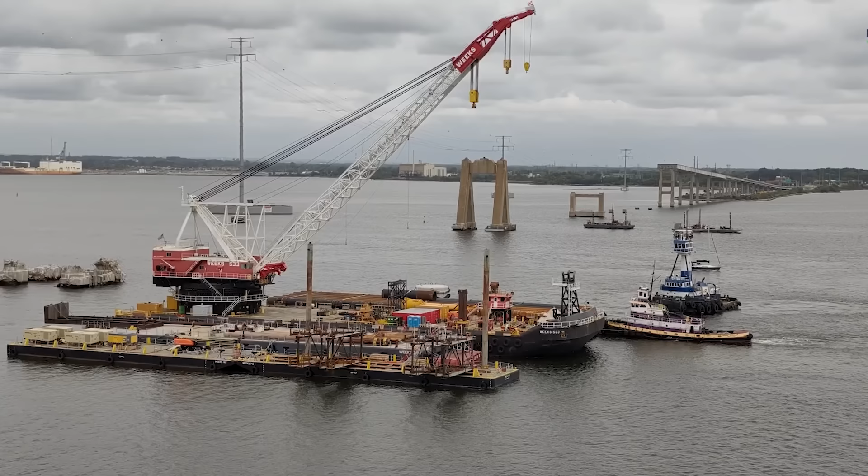In early 2024, a single electrical failure on a container ship and a bridge design from the 1970s triggered one of the most expensive bridge rebuilds in US history. Now the federal government is paying billions to replace a 2-mile crossing with something taller, longer, and built like a fortress. A new Francis Scott Key Bridge that will cost up to $5.2 billion,

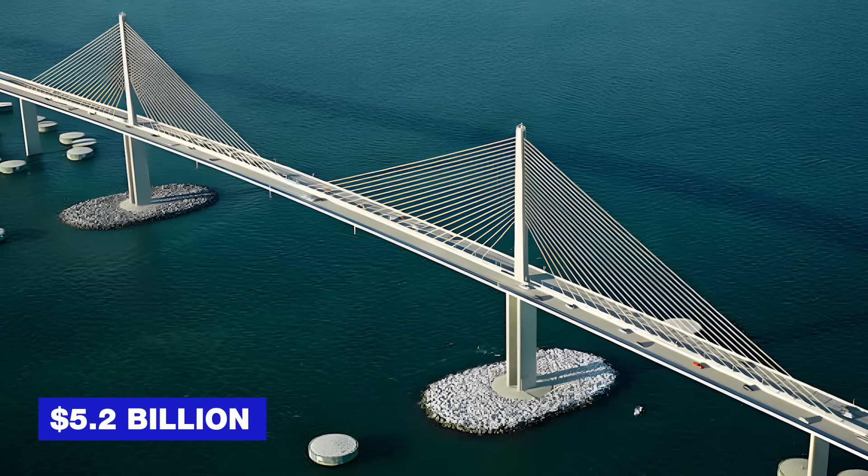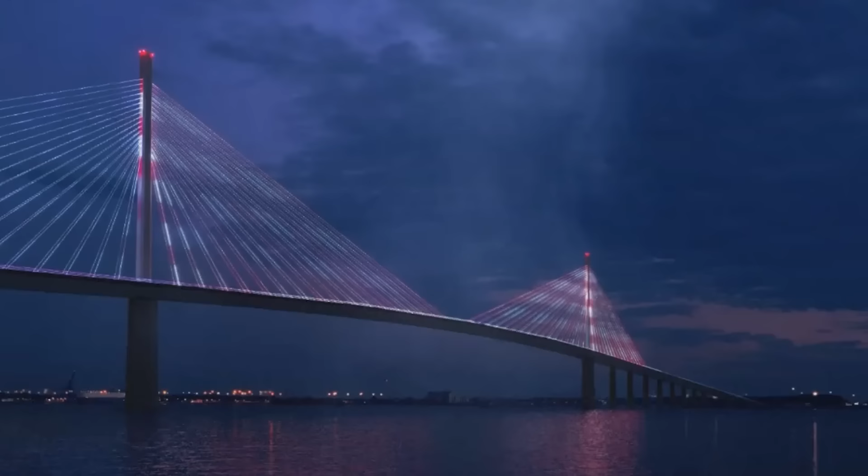rise high enough for a 20-story building to pass beneath it, and defend itself with man-made islands designed to take the hit if a ship ever loses control again. This is the insane scale of America's new $5.2 billion Key Bridge, and why it has to be this extreme. To understand that, we have to look at what fell and how vulnerable it really was.

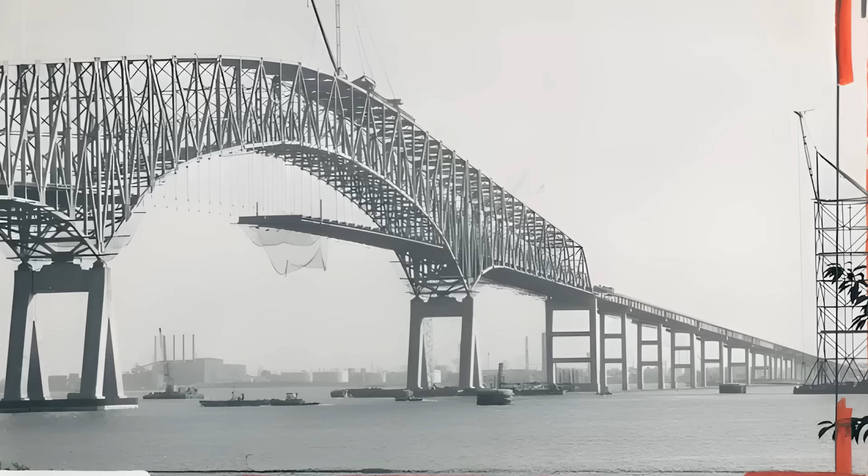When it opened in 1977, the Francis Scott Key Bridge completed Baltimore's outer beltway. It was a steel truss bridge almost 1.6 miles long, with a 1,200-foot main span stretching across the Patapsco River. Before the collapse, it carried around 40,000 vehicles a day. For almost 5 decades, it did its job without drawing much attention until March 26, 2024.

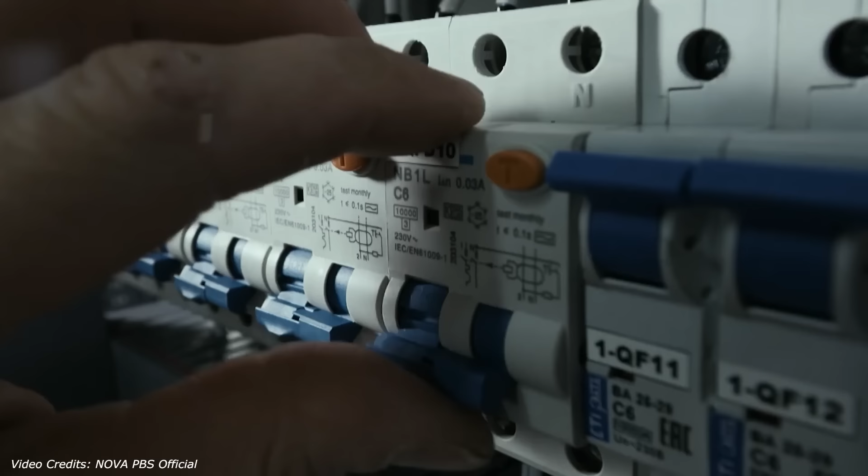That morning, the MV Dali, a fully loaded container ship, was leaving Baltimore Harbor. Then, without warning, it lost power. Investigators later found the cause to be a single loose wire. Not a major failure, not a complicated breakdown. One electrical connection shook loose while the ship was maneuvering. The vibration broke the circuit. The ship's electrical system shut down. Lights off, steering gone. At that point, the Dali was drifting at 8 knots with no way to stop.

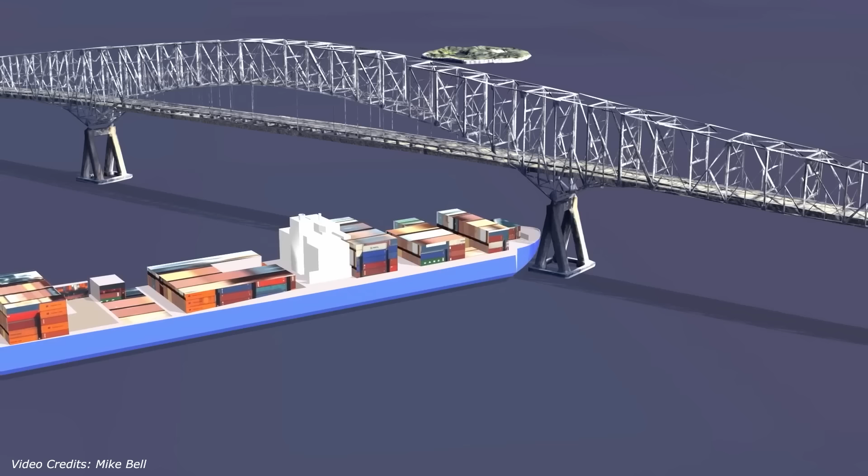It struck Pier 17, and this exposed the bridge's biggest weakness. It was fracture critical, meaning if one main support failed, the entire structure could collapse. And it did within seconds. But there's another part of the story. The people responsible for the bridge had been warned about this exact vulnerability.

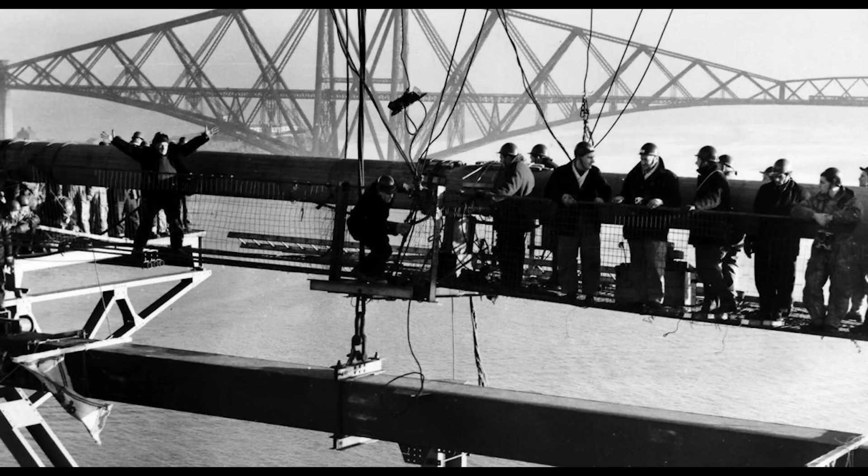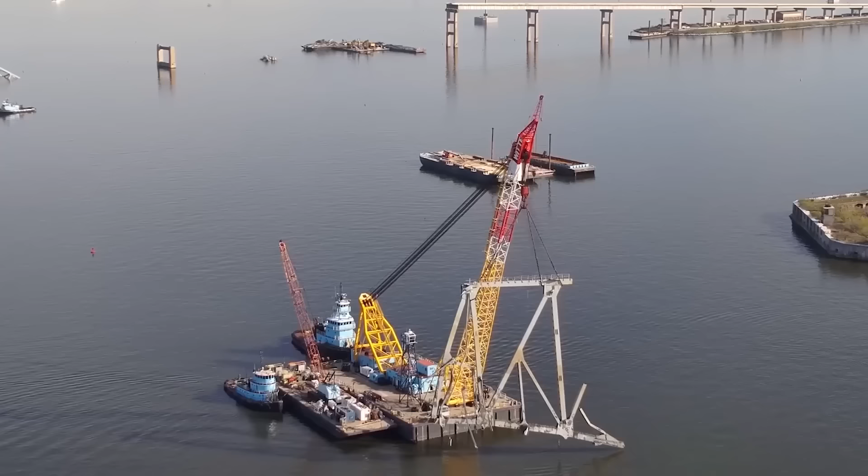Federal guidelines in 1991 recommended risk assessments for bridges like this. The same recommendation came again in 2009. Neither assessment was ever done. If they had been, the danger would have been impossible to ignore. By current standards, the Key Bridge was operating at a risk level roughly 30 times higher than what's acceptable for a major ship collision. So this wasn't just a ship losing power.

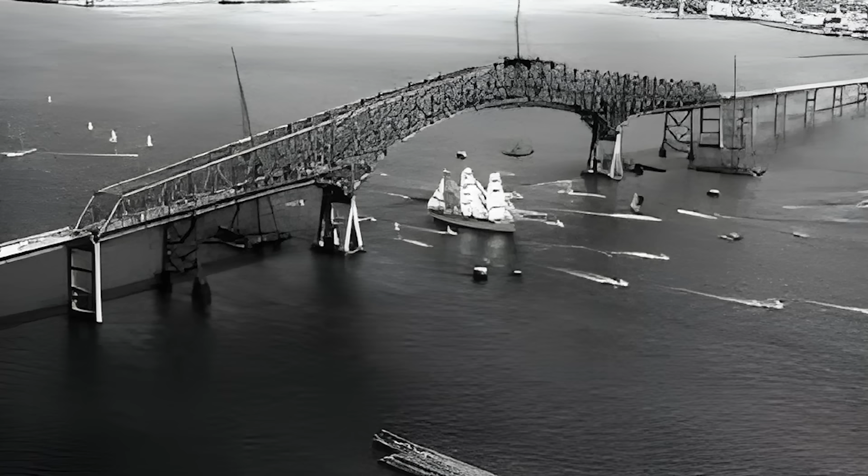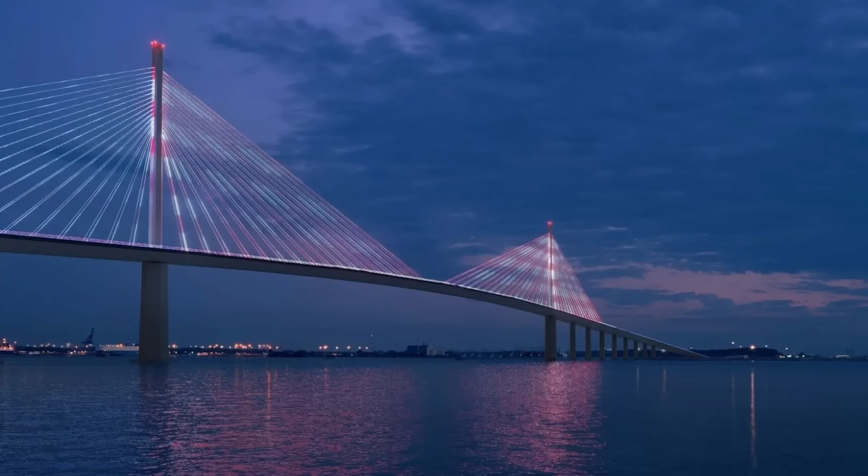It was a bridge designed in the 1970s facing ships that are far larger and heavier than anything its engineers ever planned for. And those ships aren't getting any smaller. The replacement for the Key Bridge isn't just a fix, it's an upgrade on almost every dimension. Taller, longer, and much harder to hit.

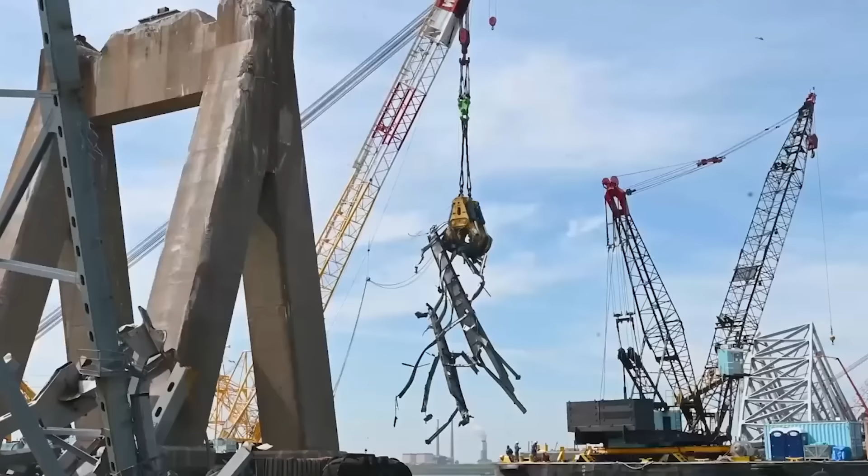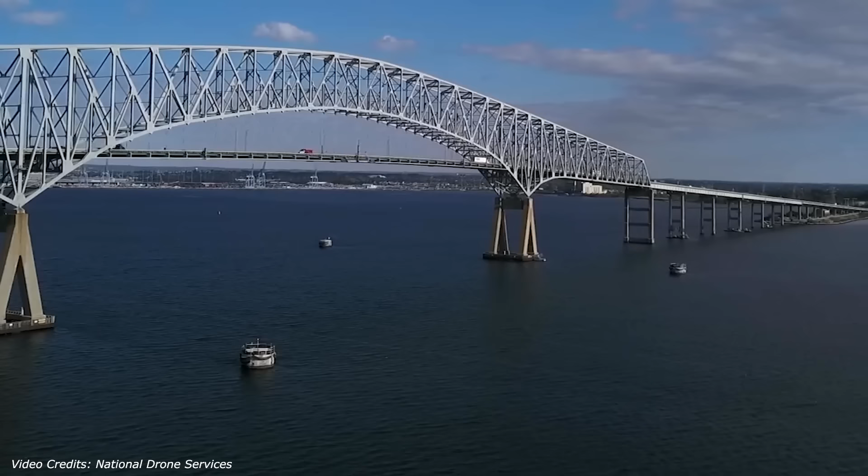Cargo was stacking up. The port was bleeding money, and every day counted. Within weeks, crews began removing the wreckage. By late spring, ships were moving again. But rebuilding the bridge itself was a completely different decision. The structure was nearly 50 years old. It had just shown how vulnerable it was. So instead of recreating the old design, officials chose to build something entirely new.

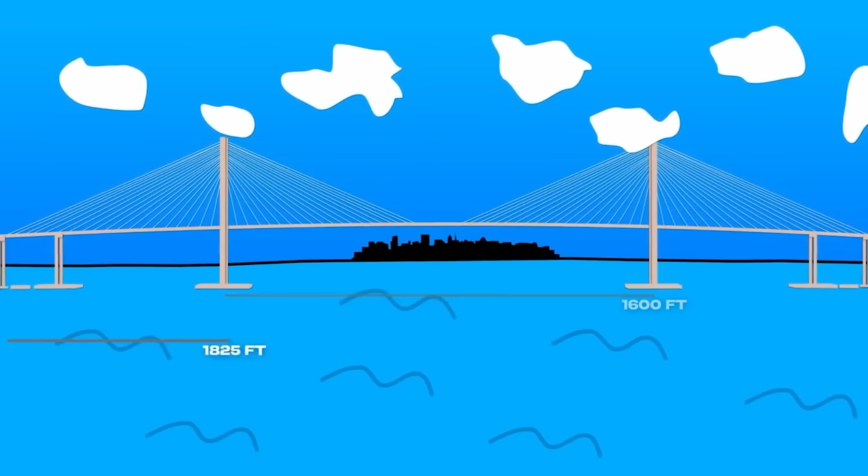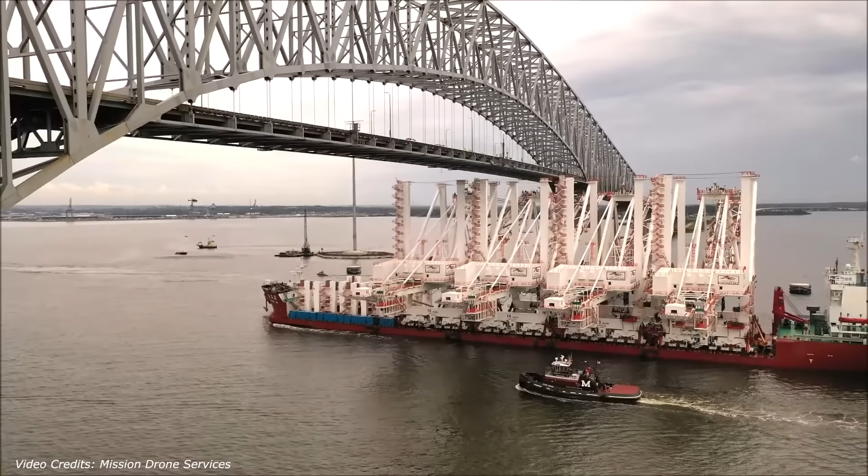A cable-stayed bridge with towers rising more than 600 feet and a main span of 1,600 feet, roughly 400 feet longer than before. Why go bigger? Because the old bridge forced ships through a tight opening, 1,200 feet wide and only 185 feet of clearance. In 1977, that worked because container ships were small. But by 2024, they were stacking containers 20 stories high.

Many modern vessels need more than 190 feet of vertical room just to pass under a bridge. The new design raises the clearance to 230 feet, and it spreads the main supports far enough apart to create a navigation channel more than 1,000 feet wide. That space isn't just for size, it's for control when something goes wrong.

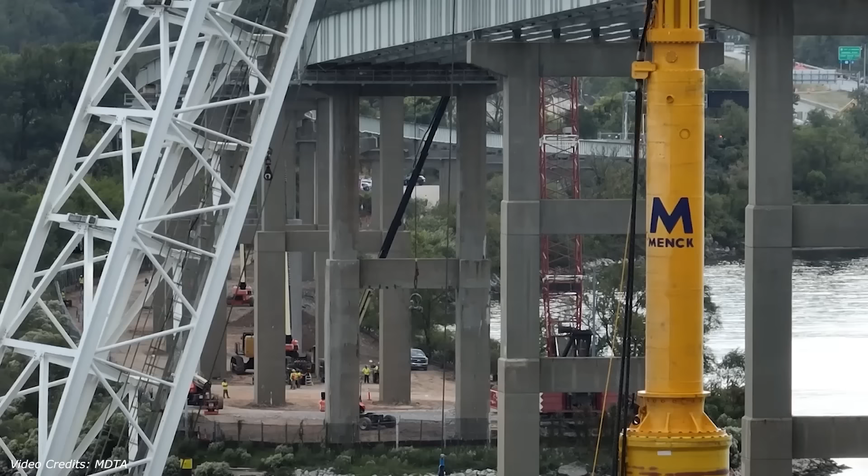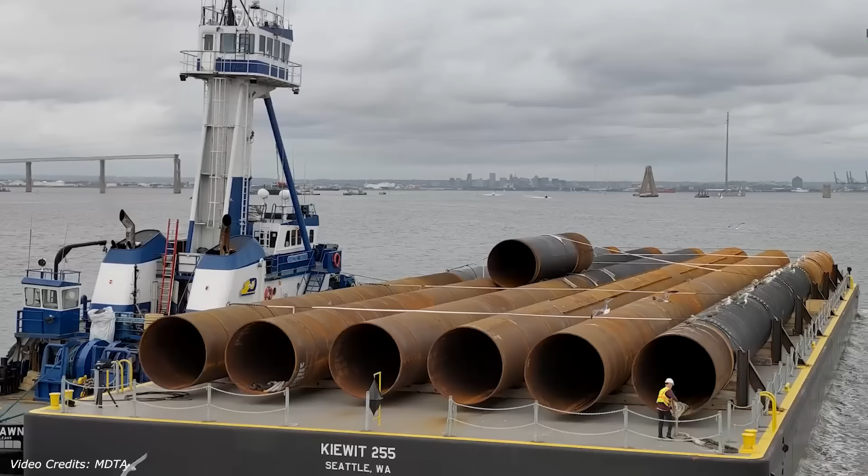But building a bridge that tall over deep water creates its own challenges. The foundations have to reach down through layers of mud and sediment that have settled for centuries. Right now, crews are running a test pile program. They're driving huge steel shafts into the riverbed and loading them with up to 10 million pounds to see how the ground responds.

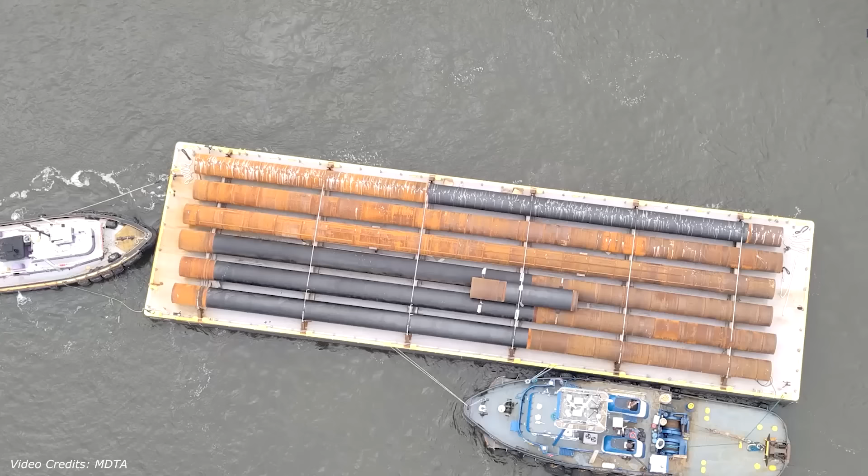Those numbers decide how the real foundations get built and whether the towers can safely rise more than 600 feet above the water. That testing alone takes 6 to 8 weeks.

The new bridge will still carry 4 lanes just like before, but with a big difference. The lanes will be wider and there will finally be real shoulders. On the old bridge, a broken down car blocked an entire lane. Now, drivers will have space to pull over.

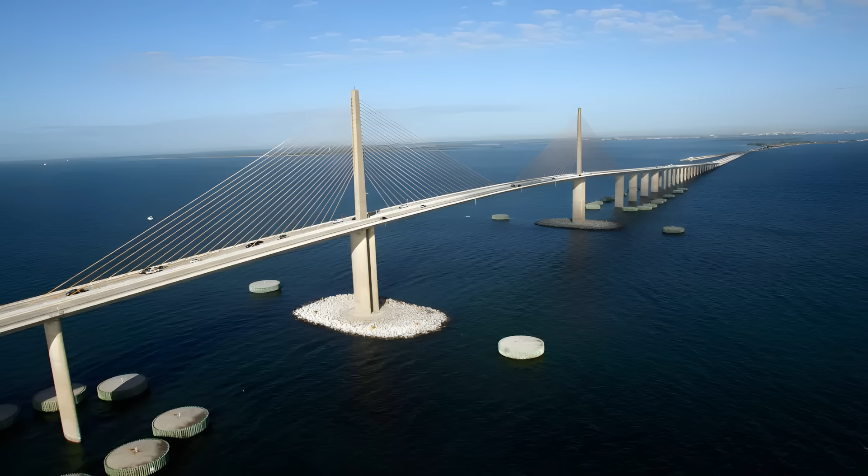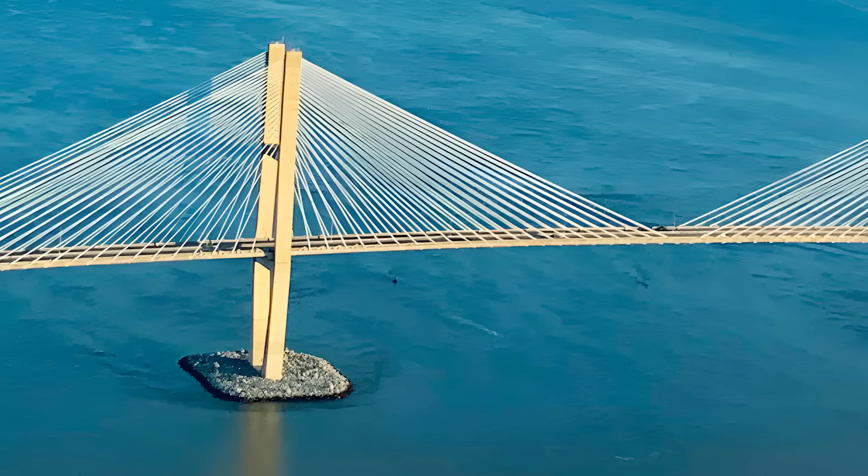And then there's the defense system. How do you stop a 1,000-foot ship from taking out a bridge pier ever again? Each main tower will be surrounded by artificial islands built from rock, concrete and fill. If a ship loses control, it hits the island instead of the bridge. The sloped sides force the hull to ride up and run aground before it ever reaches the tower.

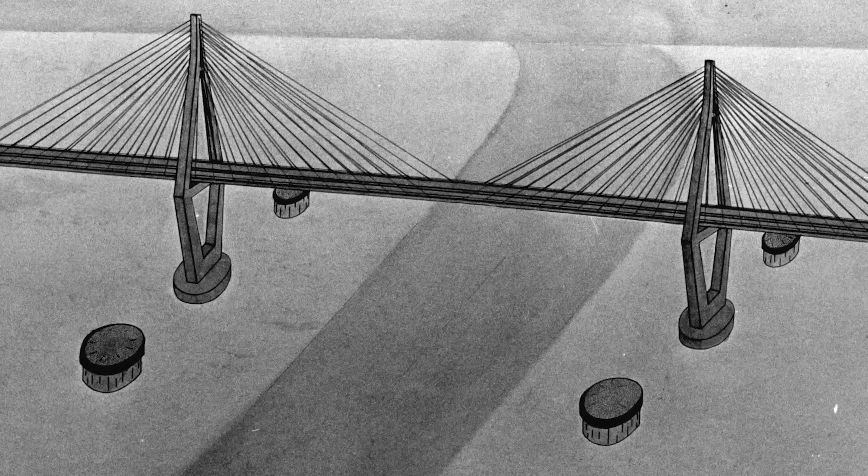On top of that, 6 enormous dolphins will sit around the navigation channel. They're standalone structures designed to absorb the impact of a fully loaded container ship. If a ship hits one, the dolphin takes the blow and the bridge survives. This protection system is a major reason the cost keeps rising. You're not just building a bridge, you're building a shield around it.

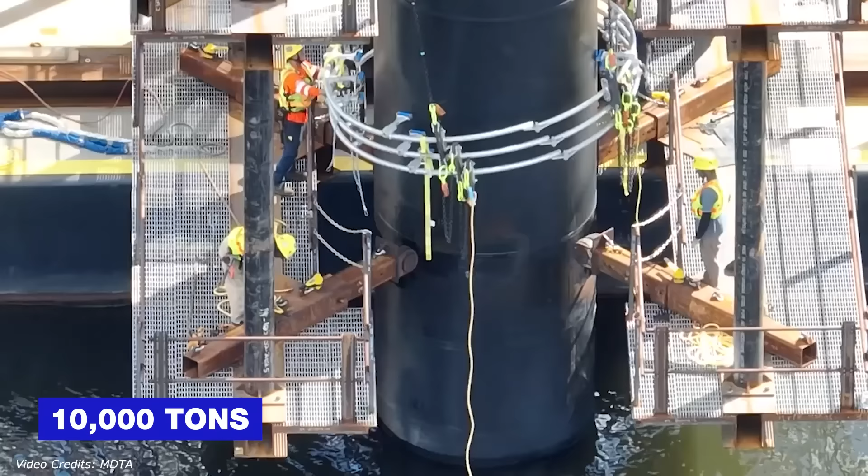As for the old bridge, most of it was removed when the channel was cleared. The steel truss is being cut into sections, shipped to permitted facilities, and recycled as scrap metal rather than just dumped. On site, about 10,000 tons of concrete from the old deck has been stockpiled and is being crushed for reuse on the project, things like temporary haul roads and staging areas.

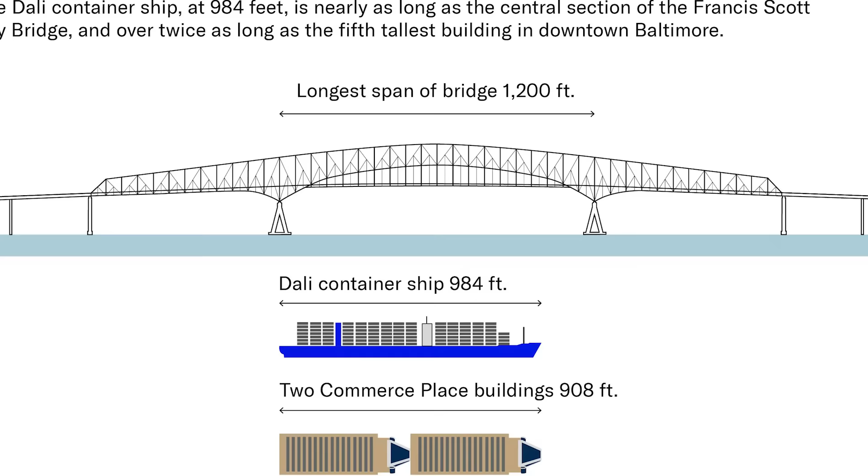Some of the old approaches may still be reused, but the main span is gone, and rebuilding the original design was never really on the table. That idea disappeared the moment the bridge fell. The problem is, building a bridge this tall, this protected, and this future-proof doesn't just change the skyline over Baltimore, it completely changes the price.

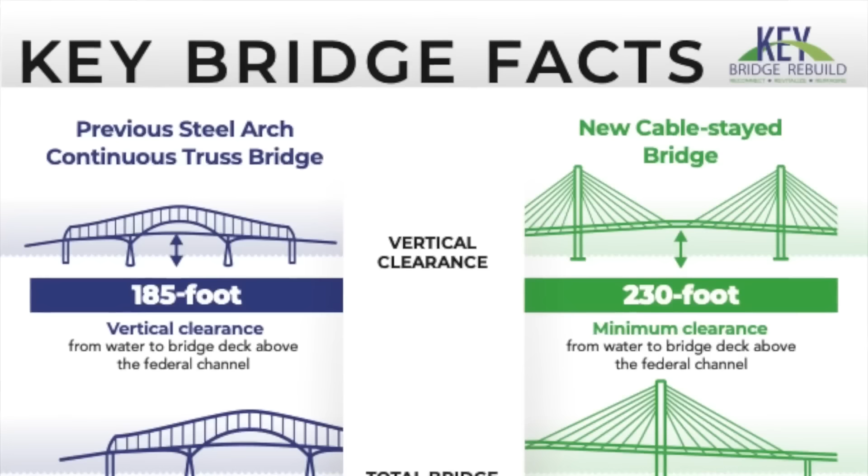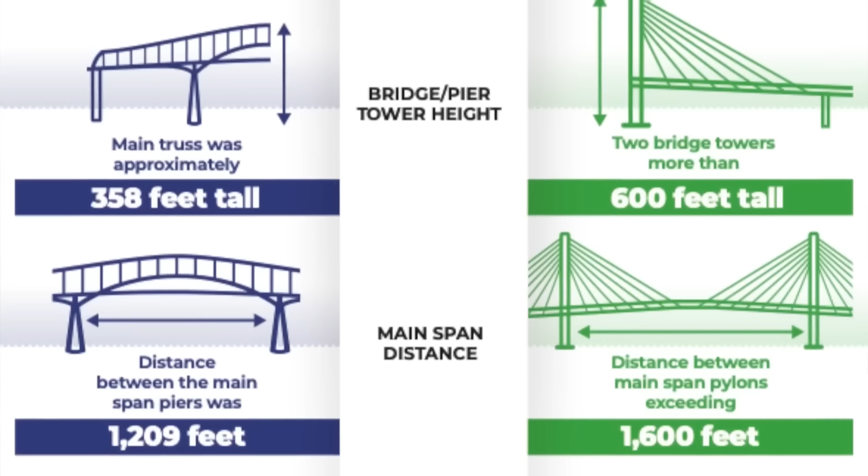So now the question is, how does a bridge project jump from under $2 billion to more than $5 billion in less than 2 years without adding any extra lanes? Back in April 2024, early rough estimates put the cost between $1.7 and $1.9 billion. By November 2025, that number had climbed to between $4.3 and $5.2 billion. And this is pretty normal when rough sketches turn into real engineering. Here are the 4 factors where the budget is going.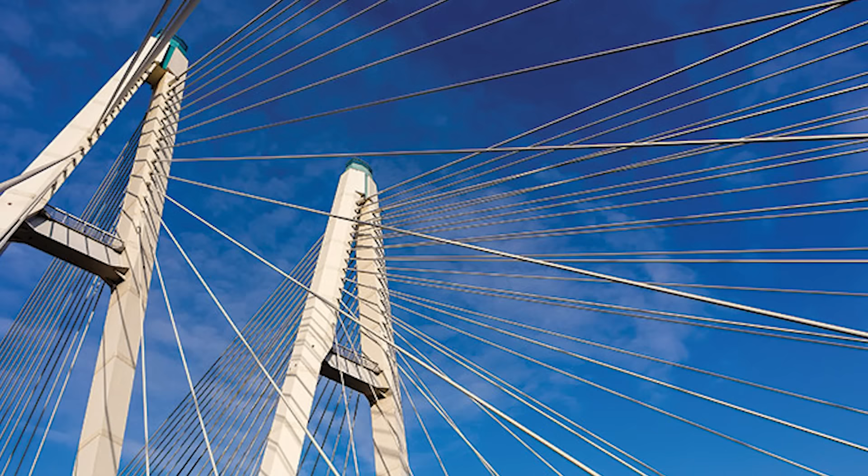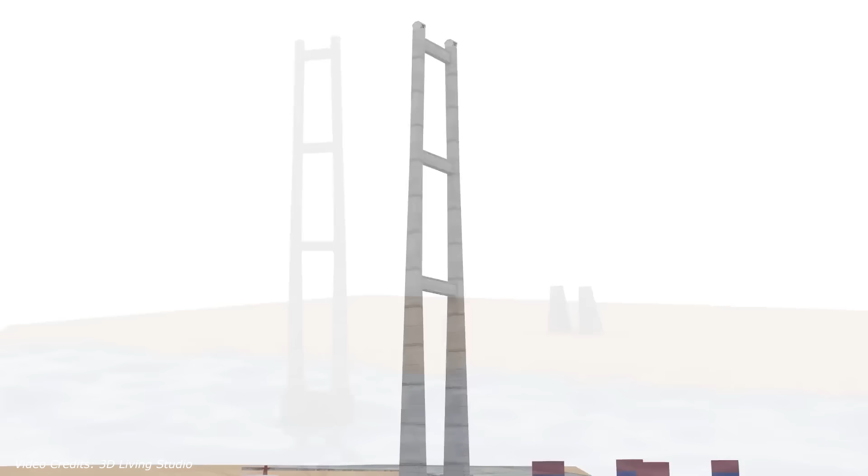First, the bridge itself. A cable-stayed span that stretches 1,665 feet needs huge amounts of material. High-strength steel for the cables, reinforced concrete for the towers, and deep foundations to hold everything up. And long spans don't scale simply. Every extra foot adds more complexity, more weight, and more cost.

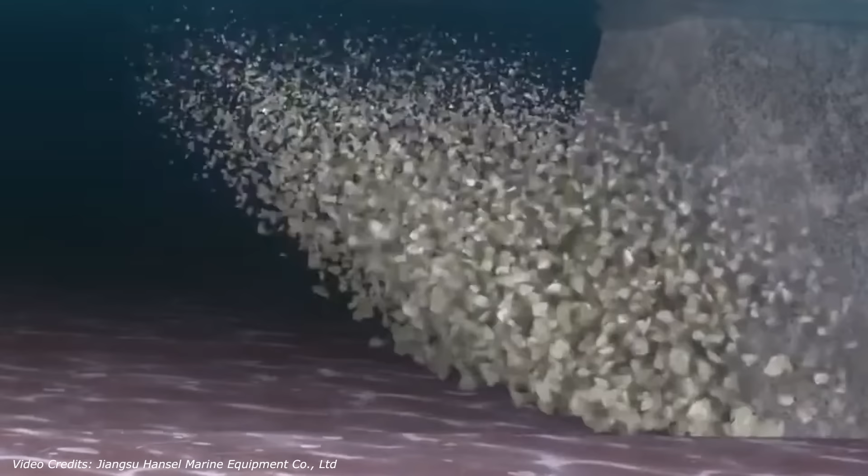Then comes the protection system. The artificial islands and the massive dolphins are a project of their own. They require millions of cubic yards of rock and fill, all built in the middle of an active shipping channel. And because these structures permanently reshape the riverbed, every step comes with strict environmental rules. This defensive system is one of the biggest drivers behind the doubled budget.

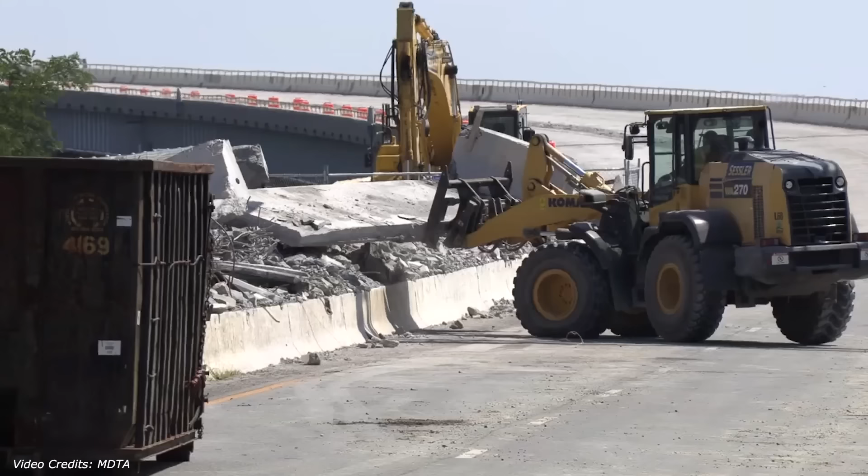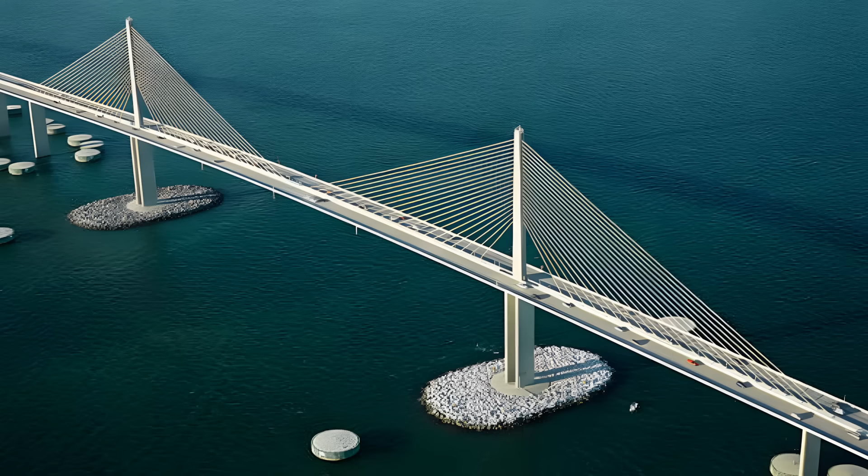Inflation plays a major role too. The Federal Highway Administration reports a 72% increase in highway construction costs over the past 5 years. Steel, concrete, heavy machinery, skilled labor, everything is more expensive. And with the bridge scheduled to open in 2030, every contract has to include future cost increases as well.

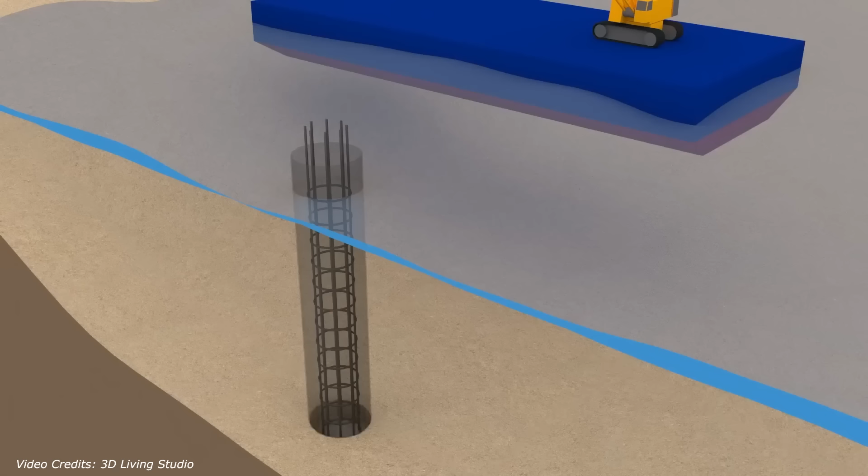There's also the speed premium. Normally, a project of this scale would spend years in planning and environmental review. This one couldn't wait. Design work and construction are happening at the same time. That speeds up the schedule, but it increases risk, and contractors charge more to take that on.

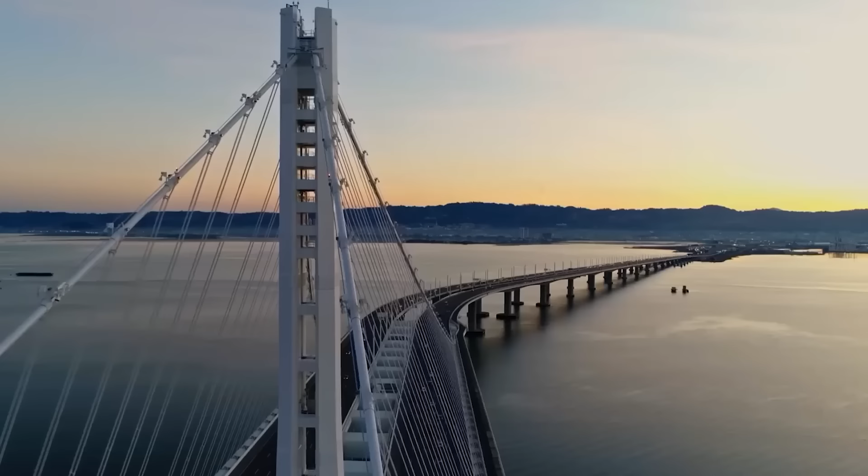So how does $5.2 billion compare? For reference, the eastern span of the San Francisco-Oakland Bay Bridge cost about $6.5 billion, and that was over a decade ago. Measured per mile, the new Key Bridge sits alongside some of the most expensive bridge builds in U.S. history. Not the single most expensive, but absolutely in the top tier. In other words, this isn't a routine replacement.

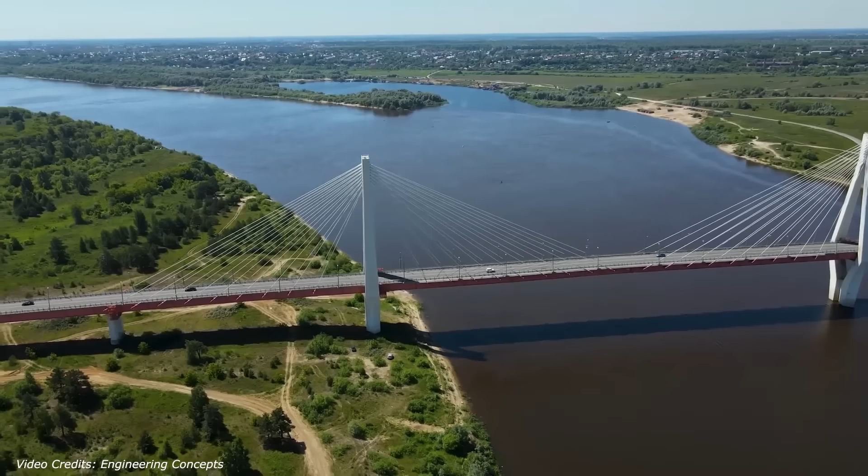It's in the same spending league as the headline megabridges you've seen on the news. So is 6 years actually fast for rebuilding a bridge like this? The new Key Bridge is expected to open in late 2030, about 6 years from collapse to completion. Globally, that may not sound fast, but for American infrastructure, it is.

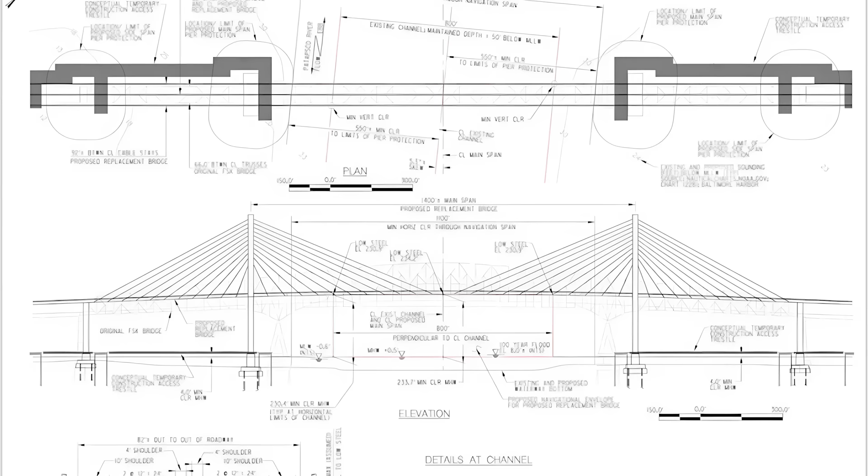It is because in the US, major bridges normally spend years, sometimes nearly a decade in design work, environmental review, and public meetings before any construction begins. The Key Bridge didn't follow that playbook. Design work started almost immediately after the collapse. Permits were pushed through quickly, and the project is using a delivery method called progressive design build, which lets contractors start early work while the final design is still being finalized. That overlap saves years. But it doesn't remove the realities of building something this large over water.

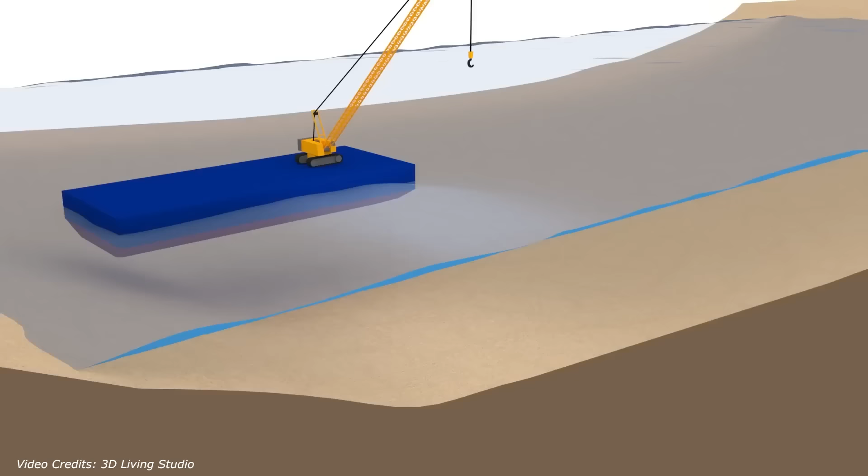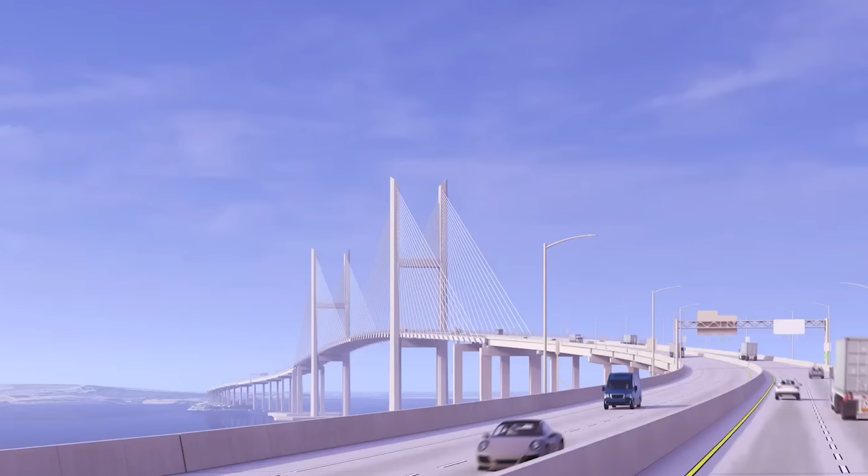Foundation work is set to begin in Q2 or 3 of 2026. After that comes the towers, then the cables, then the deck. Each step relies on the last, and marine construction leaves no room for shortcuts. Storms, tides, equipment moves, and narrow work windows all slow progress. So what will drivers see when the bridge opens?

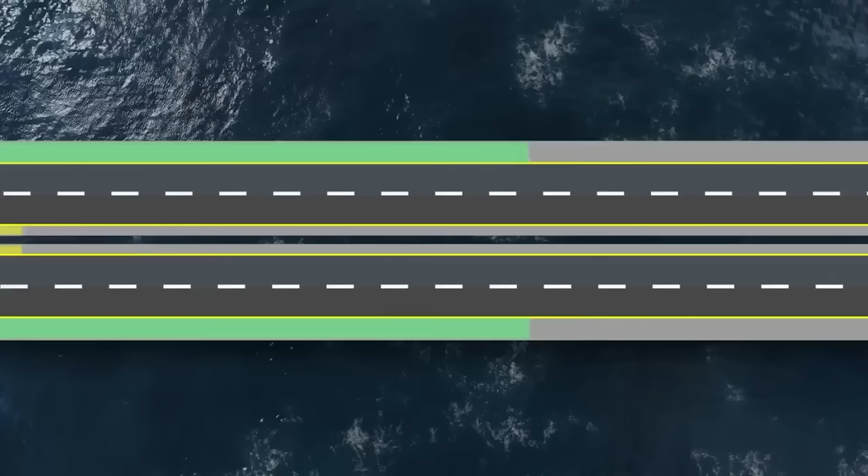Still 4 lanes, but the experience will feel different. Wider lanes, real shoulders, better visibility. For truckers heading to the port, it's the same route they've always taken, but for the port itself, this clearance upgrade is enormous. A 230-foot vertical clearance isn't just for ships today. It's built for ships that don't exist yet. The global fleet keeps growing. 20 years from now, vessels entering Baltimore will be larger than anything the old bridge could have handled. This new one is designed to stay ahead of that curve.

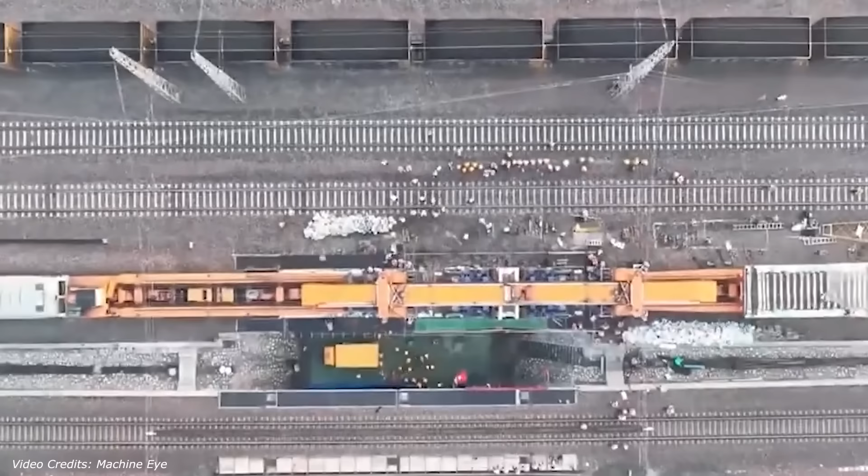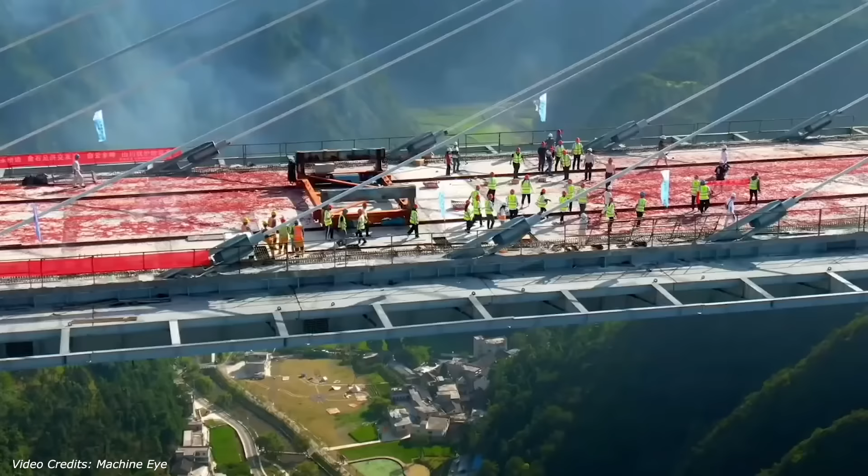It's true that some countries build faster. China, for example, has delivered similar scale bridges in equal or even shorter timeframes, but they operate under a different model. There's less regulatory oversight, centralized authority, and quicker land approvals. The US trades speed for more review, more process, and more environmental protection. The design of the Key Bridge does help with speed, though. Cable-stayed bridges need fewer piers in the water, which means fewer deep foundations, the slowest part of any marine project.

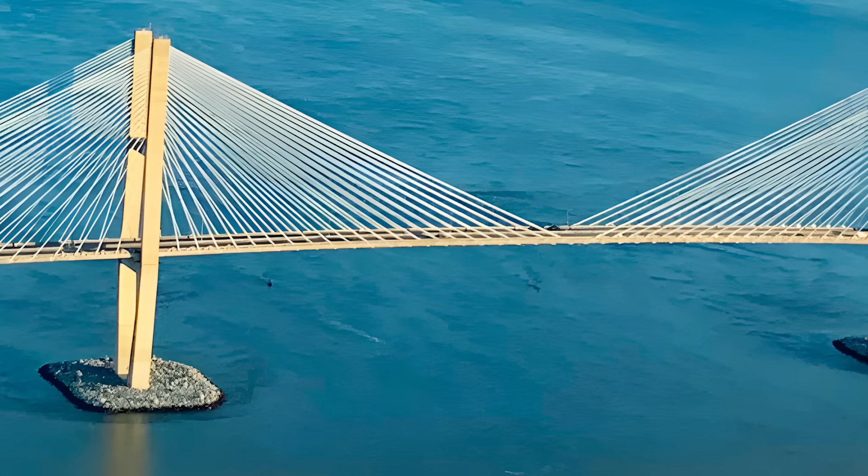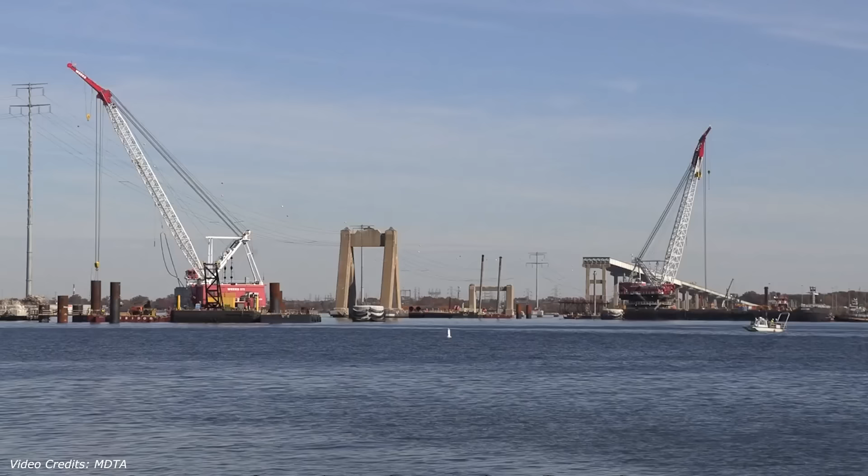And that fortress protection system helps too. By placing the main supports outside the navigation channel, workers don't have to shut down ship traffic every time they build a pier. Even with all these efficiencies, finishing a project of this scale in 6 years is considered a sprint in the world of infrastructure.

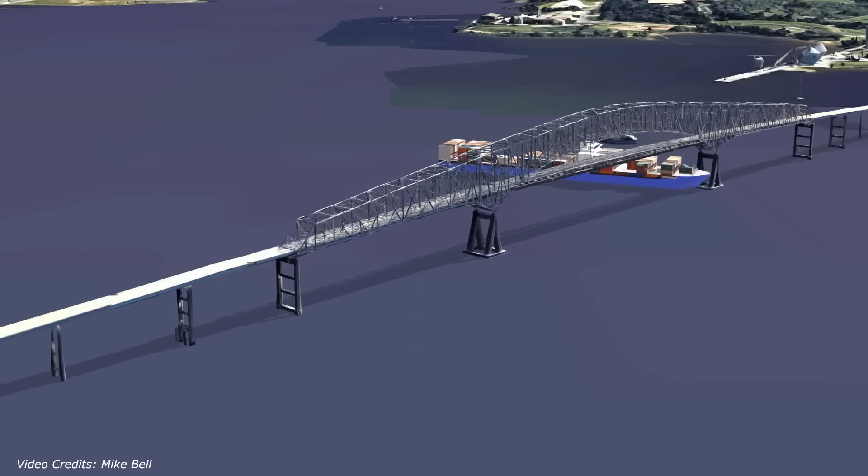Before we finish, there's something we can't skip. The people who were on the bridge that night. 6 construction workers were out there doing overnight maintenance when the ship lost control. They never had the chance to get off the span. Their families are still living with that loss. Memorials line the waterfront, and the final design for the new Key Bridge includes a permanent memorial to honor them.

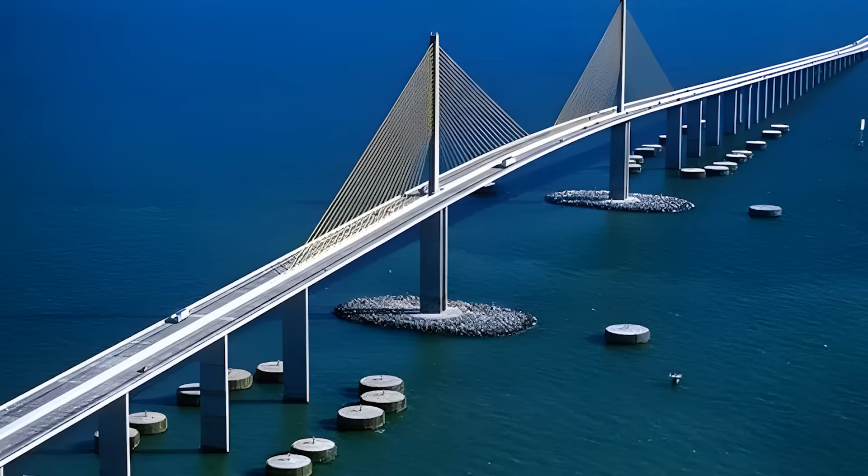This new bridge is meant to make a disaster like that much harder to repeat. Stronger wind standards mean the towers and deck are designed to handle hurricane-level gusts. A higher deck helps protect against storm surge. And even though Baltimore isn't a major earthquake zone, the structure is still being designed to meet modern seismic requirements, on top of a pier protection system that simply didn't exist before.

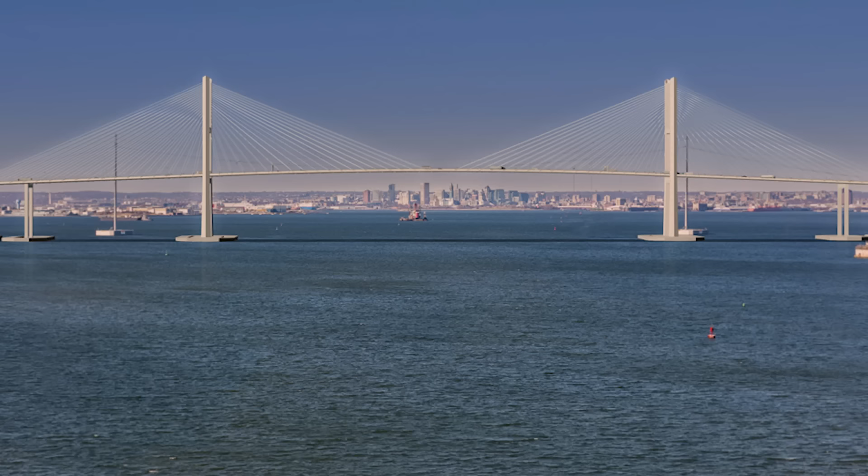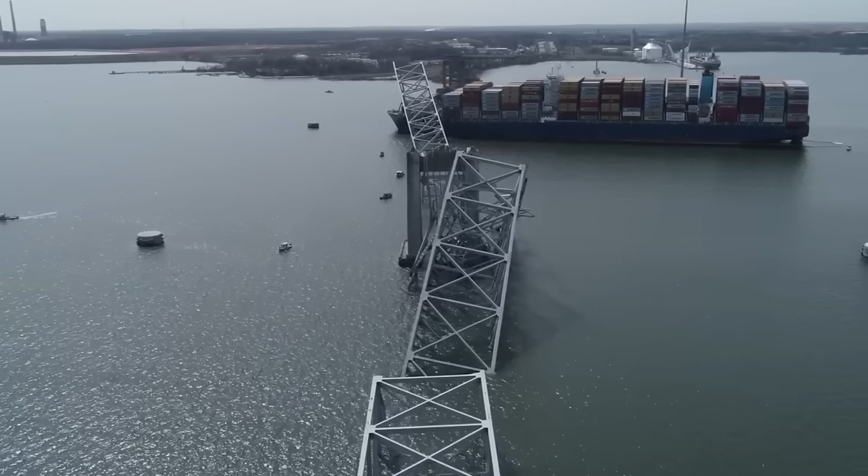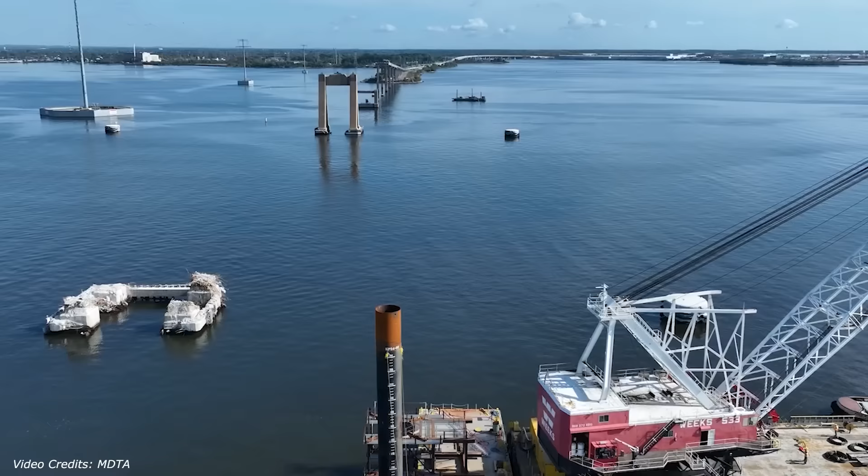So what does this bridge say about the future of American infrastructure? This isn't a 50-year bridge. It's a roughly 100-year bridge. It's built for ships that don't exist yet, and it's designed to survive situations we hope we never see. A disaster in 2024 forced America to rebuild the Key Bridge. The replacement is a fortress, intended to make sure the same kind of failure is far harder to pull off a second time. So the real question is this. Is this level of engineering worth $5.2 billion? Or would you rather see more bridges built faster and cheaper, even if they're not this overprotected?